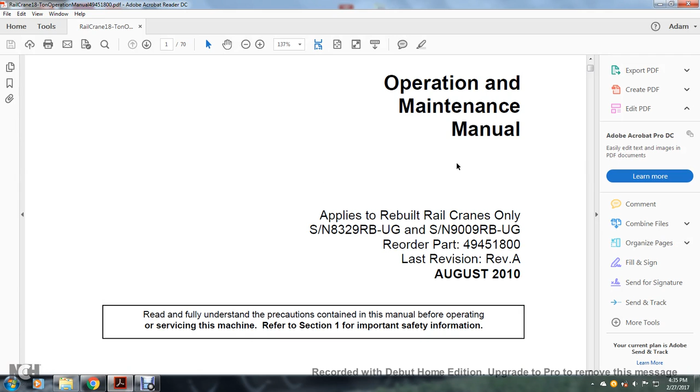The Nordco Rail Crane RBUG Operation Maintenance Manual applies to rebuilt rail cranes only. Latest version is A, August 2010.

Section 1, Safety: safety alert symbols, definitions, general safety tips, safety prior to working, safety while starting the machine, safety while operating and traveling, safety while parked, safety during maintenance, machine safety alerts, lockout and tag out requirements and procedures.

Section 2: general about this manual, machine specification, general machine, general crane system specification, sling load capacities, optional info, working in winds recommendations. Machine dimensional information not available in time for printing.

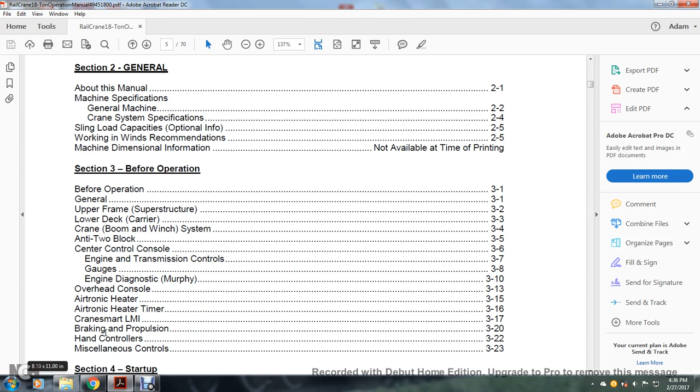Section 3, before operation: general upper frame, lower deck, upper frame superstructure, lower frame carrier, crane, boom and winch system, anti-two block, center control console, engine, transmission controls, gauges, engine diagnostic, Murphy, overhead console, Airtronic heater, timer, Cranesmart, LMI, brake propulsion and hand controls, miscellaneous controls.

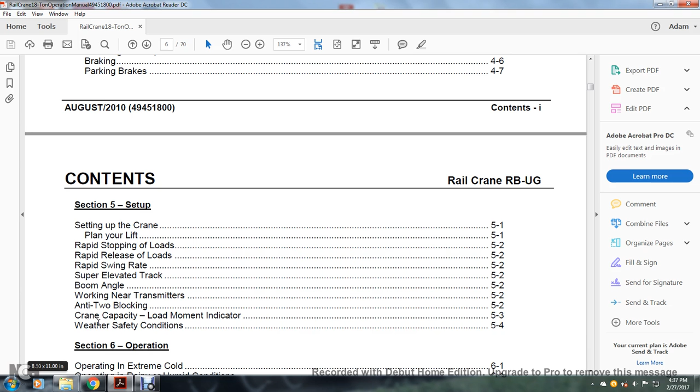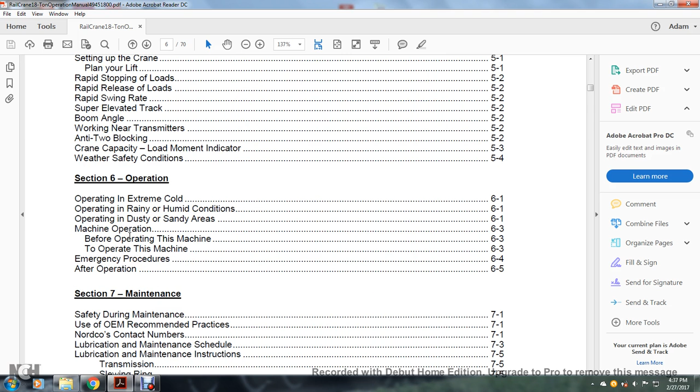Weight, weather safety conditions. Section 6: operation in extreme cold, operation in rainy and humid conditions, operation in dusty and sandy areas. Machine operation: before operation of the machine, to operate the machine, emergency procedures, after operations.

Section 7, maintenance: safety during maintenance, use of OEM recommended practices, Nordco contact numbers, lubrication maintenance schedule, lubrication maintenance instructions, transmission, slewing ring, air dryer, crane system general, general pneumatic drive, pneumatic hydraulic winches, magnet winches, rotomatic magnet gear, generator, sheaves, rope inspection.

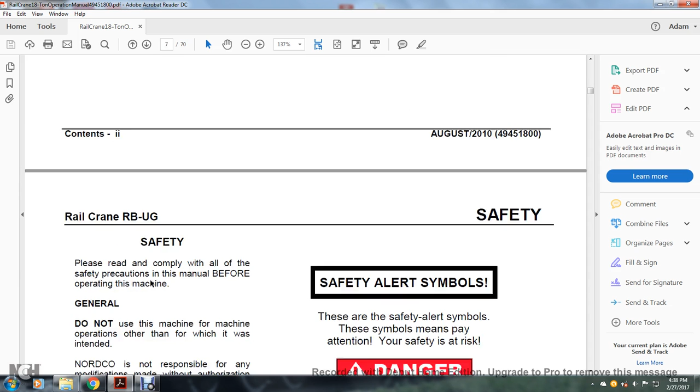Safety. Please read and comply with all the safety precautions in this manual before operating the machine. General: do not use this machine for operation other than what it was intended for.

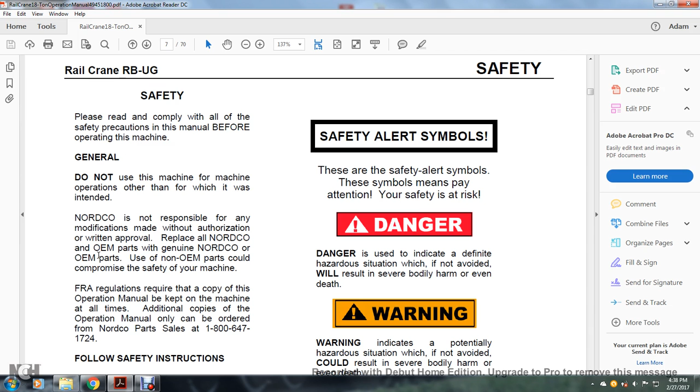Nordco is not responsible for any modification without authorization or written approval. Replace Nordco or OEM parts with genuine Nordco or OEM parts. Use of non-OEM parts could compromise the safety of your machine.

FRA regulations require that a copy of this operation manual be kept with the machine at all times. An additional copy of the operation manual can be ordered from Nordco Parts Sales at 1-800-647-1724.

Follow safety instructions. Carefully read all the safety messages in this manual. Learn how to operate the machine and how to use the controls properly. Do not let anyone operate the machine without instruction. Failure to understand the contents of this manual could result in serious personal injury or death. Safety alerts in this manual are for the machine as it was designed.

The operator and job site supervisor should have knowledge of the applicable OSHA regulations in the U.S. and CSA standards in Canada, Z150-98, and suggested American Society of Mechanical Engineering and American National Standards Institute safety standards for cranes.

A good reference source for crane safety is the Department of Energy standard for hoisting and rigging. Copies of standards specifically related to rail cranes can be found on the DVD or CD supplied with this machine. It is not provided in paper format.

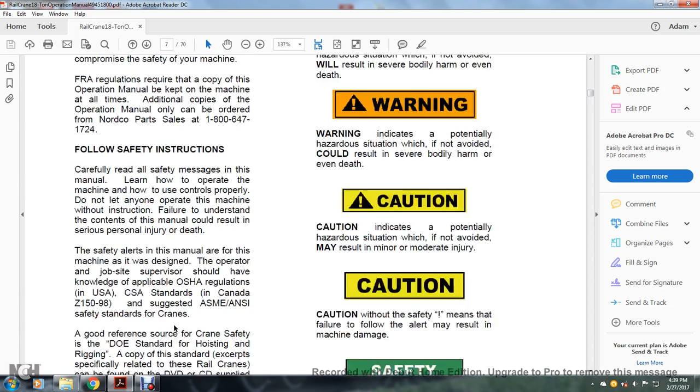Safety alert symbols: check out the large white and black block with the extreme exclamation point. These are safety alert symbols. These symbols mean pay attention to your safety risk.

A square danger symbol with a triangle and an exclamation point in white and red is 'Danger', used to indicate a definite hazard situation which, if not avoided, will result in severe bodily harm or even death.

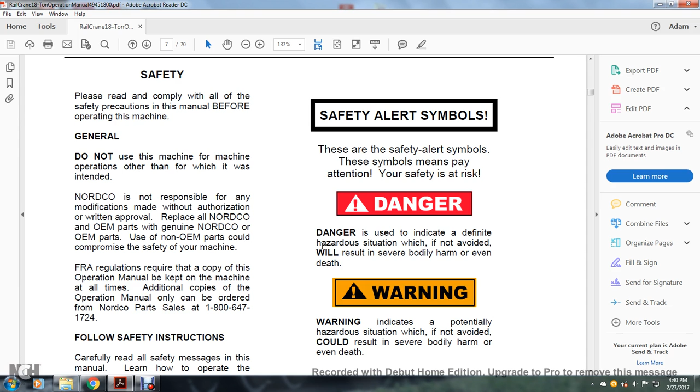A square triangle with an exclamation point in black and yellow is 'Warning', which indicates a potential hazard situation which, if not avoided, could result in severe bodily harm or even death.

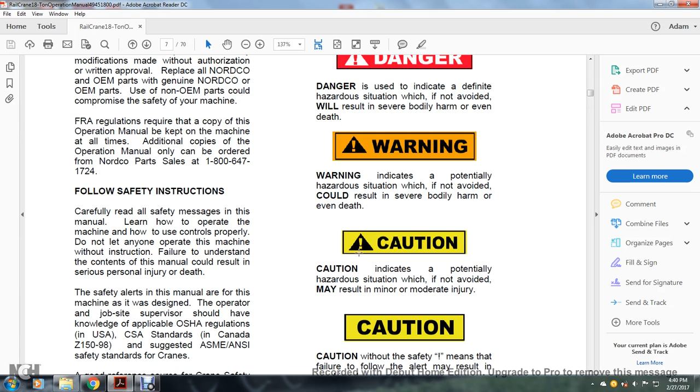A yellow 'Caution' with an exclamation point triangle indicates a potential hazard situation which, if not avoided, may result in minor or moderate injury.

Caution in yellow and black, shown without the exclamation point, means that failure to follow the alert may result in machine damage.

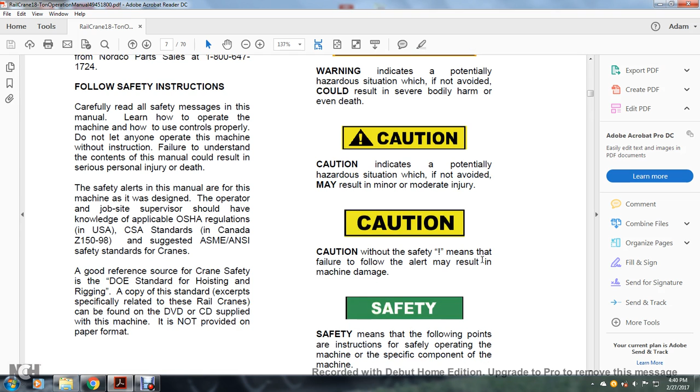A green and white 'Safety' symbol means the following points are instructions for safely operating the machine and its specific components.

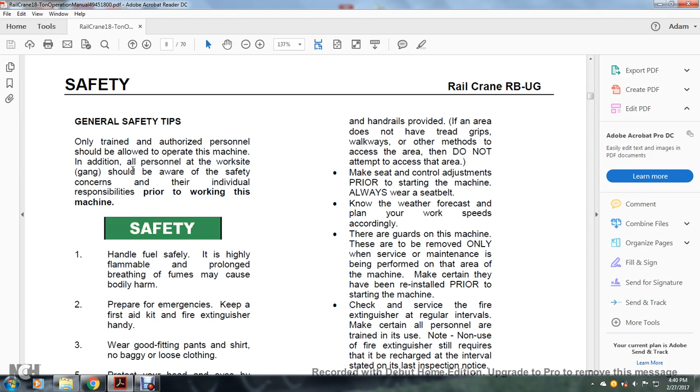General safety tips: only trained, authorized personnel should be allowed to operate the machine. In addition, all personnel at the work site should be aware of the safety concerns and their individual responsibility prior to working with this machine.

Handle fuel safely. It is highly flammable, and prolonged breathing of the fumes may cause bodily harm. Prepare for emergencies by keeping a fire extinguisher handy.

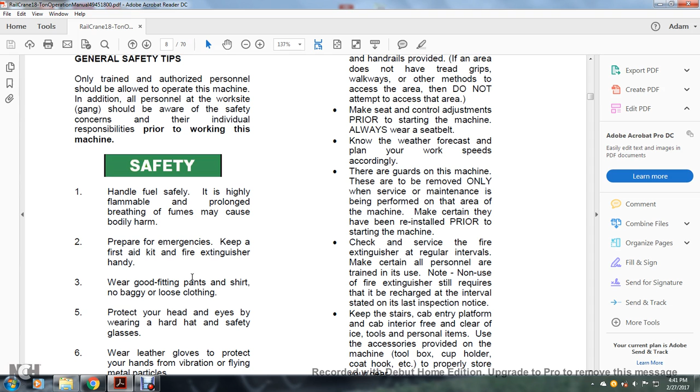Wear good-fitting pants and shirts, no baggy or loose clothing. Protect your head and eyes by wearing a hard hat and safety glasses. Wear gloves to protect your hands from vibration or flying metal particles. Use safety-toed work boots.

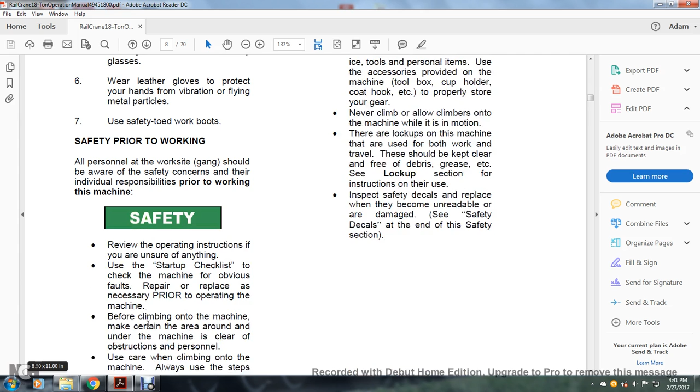Safety prior to working: all personnel at the work site should be aware of the safety concerns and their individual responsibility prior to working with this machine.

Review the operating instructions if you are unsure of anything. Use the startup checklist to check for obvious faults in the machine, and repair or replace parts as necessary prior to operating the machine.

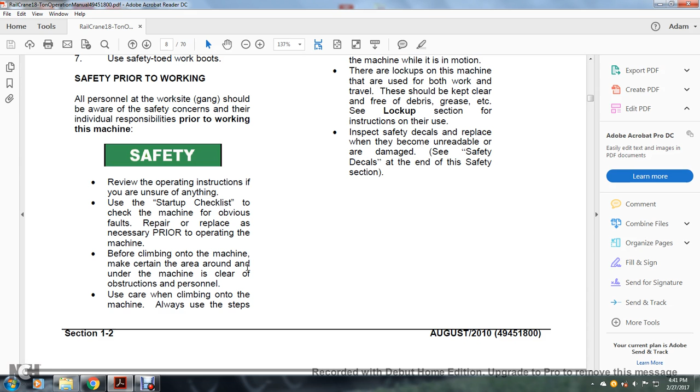Before climbing onto the machine, make certain the areas around and under it are clear of obstructions and personnel. Use care when climbing onto the machine. Always use the steps and handrails provided. If an area does not have tread grips, walkways, or other methods of access, do not attempt access to that area.

Make seat and control adjustments prior to starting the machine. Always wear a seatbelt. Know the weather forecast and plan your work speeds accordingly.

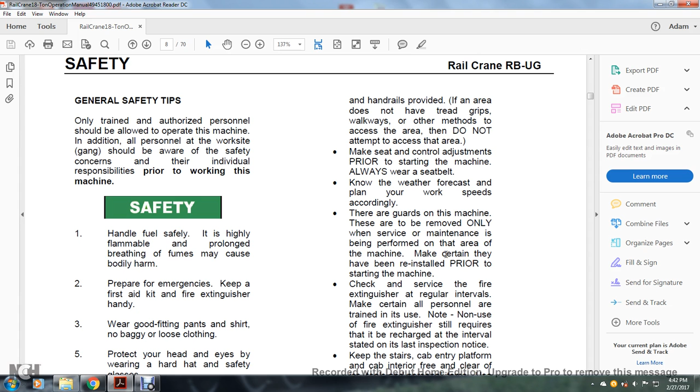If the guards on the machine are removed, they are to be removed only when service or maintenance is being performed on that area of the machine. Make certain they have been reinstalled prior to starting the machine.

Check and service the fire extinguisher at regular intervals, and make certain all personnel are trained to use it. Note that even if not used, the fire extinguisher still requires recharging at the intervals stated on the last inspection notice.

Keep the stairs, cab entryway, platform, and cab interior free and clear of ice, tools, and personal items. Use the accessories provided on the machine, such as the toolbox, cup holder, and coat hook, to properly store your gear.

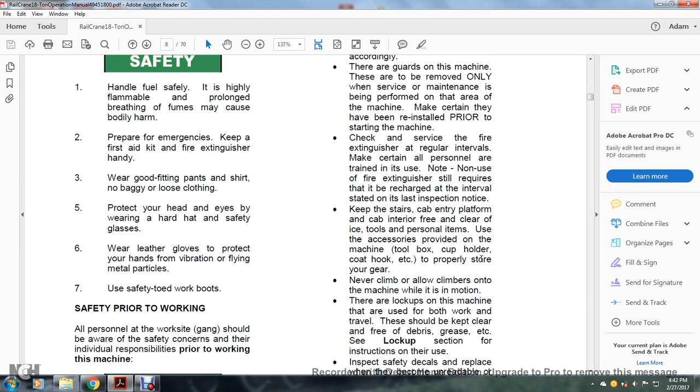Never allow climbing onto the machine while it is in motion. There are lockups on the machine used for both work and travel; these should be kept clear and free of debris or grease. See the lockup section for instructions on their use.

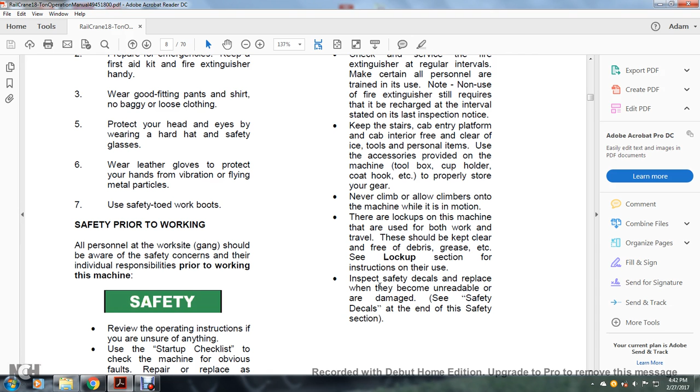Inspect and replace safety decals where they become unreadable or damaged. See the safety decals at the end of the safety section.

Safety while starting the machine: Nordco recommends the use of the command position. This means the machine should never be running unless someone is at or near the main control panel or remote control boxes, to prevent injury or damage to the machine. This is highly recommended.

Safety: only start or operate the machine when seated in the operator's seat. Check the startup checklist, and check the machine controls and gauges to make certain the system is operating correctly.

Safety while operating and traveling: assume all power lines are live. While operating the boom, make certain the boom and load stay at least 10 feet away from electrical power lines. If you do not know the voltage of nearby power lines, assume the maximum voltage and stay clear by at least 45 feet.

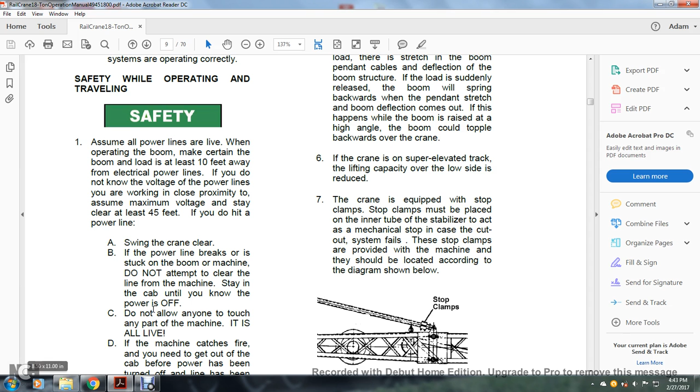If you do hit a power line, swing the crane clear. If the power line breaks and gets stuck on the boom or machine, do not attempt to clear the line from the machine. Stay in the cab until you know the power is off, and do not allow anyone to touch any part of the machine, as it is still live. If your machine catches fire, you need to get out of the cab.

Before the power has been turned off and the line has been cleared, you must jump clear of the machine. Do not touch any part of the machine during the escape, and do not touch the crane while stepping on the ground. This will be fatal.

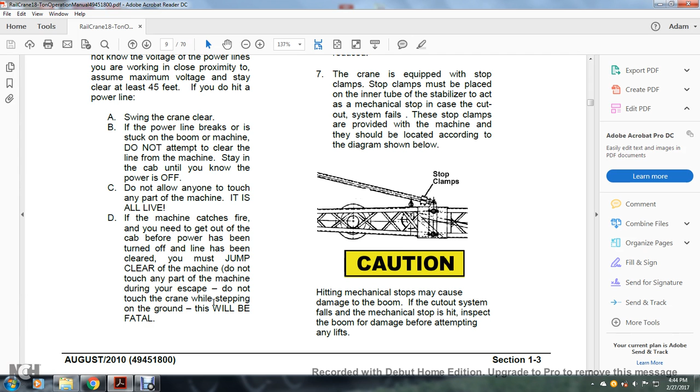Be especially careful when swinging, as the load's momentum can effectively cause the load to exceed the crane's capacity. Be aware that crane capacity is reduced when loaded at a right angle with the track over the side. Refer to the capacity chart and dimensional information in the general section of the manual for more information.

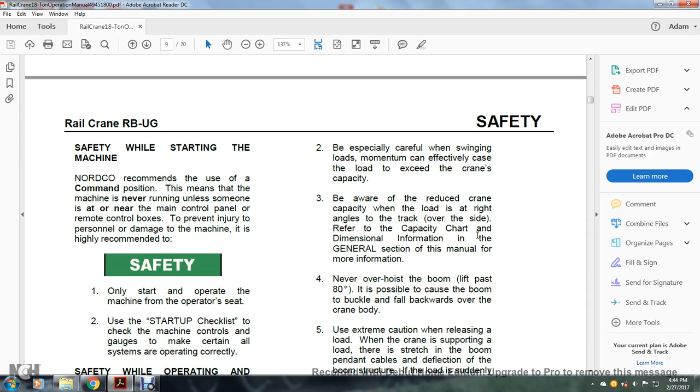Never overhoist the boom or lift past 80 degrees; it's possible to cause the boom to buckle and fall backward over the crane body. Use extreme caution when releasing the load, as when the crane is supporting a load under tension, there is a stretch in the boom pendant cables deflecting with the boom structure.

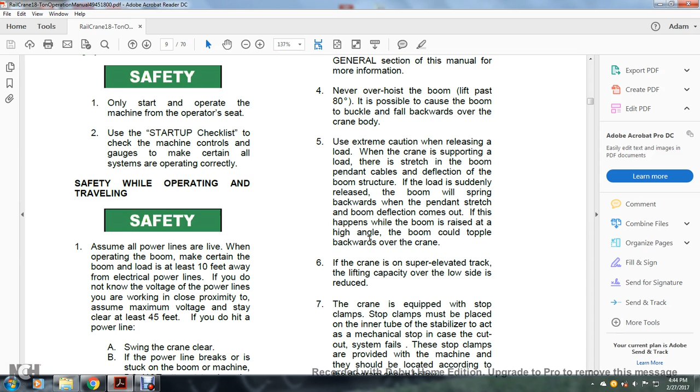A load suddenly released causes the boom to spring backwards when pendant stretch and boom deflection come out. If this happens while the boom is raised at a high angle, the boom could topple backwards over the crane. If the crane is on a super-elevated track, the lifting capacity over the low side is reduced.

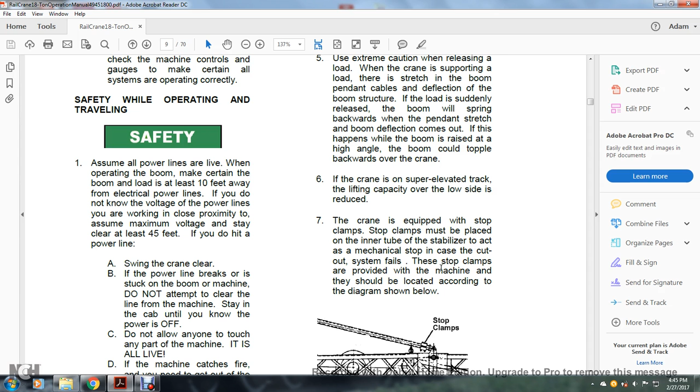The crane is equipped with stop clamps. Stop clamps must be placed at the inner tube of the stabilizer to act as a mechanical stop in case the cutout system fails. These stop clamps are provided with the machine and should be located according to the diagram shown below, on the boom and on the crane.

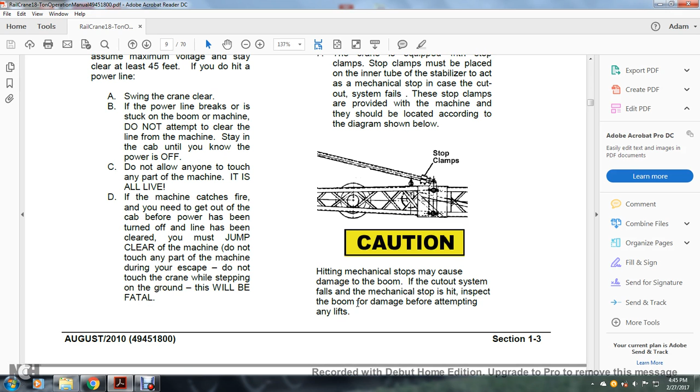Caution: hitting mechanical stops may cause damage to the boom. If a cutout system fails, mechanical stop contact may damage the boom. Inspect the boom before attempting any lifts. Never operate the crane with a damaged boom. Even slight damage can greatly reduce boom strength. The boom must be replaced or repaired before the crane is used.

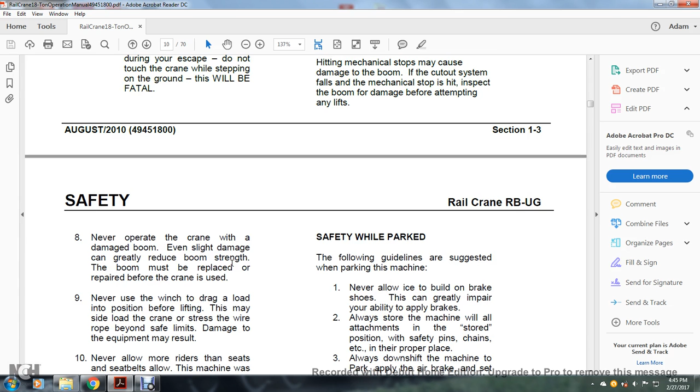Never use the winch to drag a load or pull it into position before lifting. This may side load the crane, or stress the wire rope beyond safe limits. Damage to the equipment may result.

Never allow more riders than there are seats or seat belts for. The machine was designed to be operated by one person and allows one passenger. This machine is equipped with a seat cutoff switch that disables machine function if the operator is not seated to operate the machine. Do not disable this function.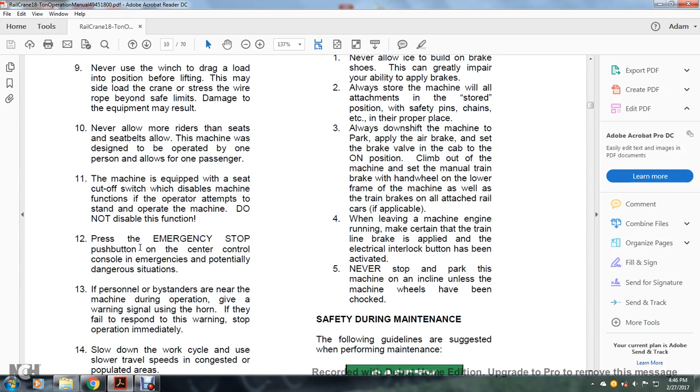Press the emergency stop button on the central control console in emergencies or potentially dangerous situations. If personnel or bystanders are near the machine during operation, give a warning signal using the horn. If they fail to respond to the warning, stop operation immediately.

Slow down the work cycle. Use slow travel speeds in congested and populated areas.

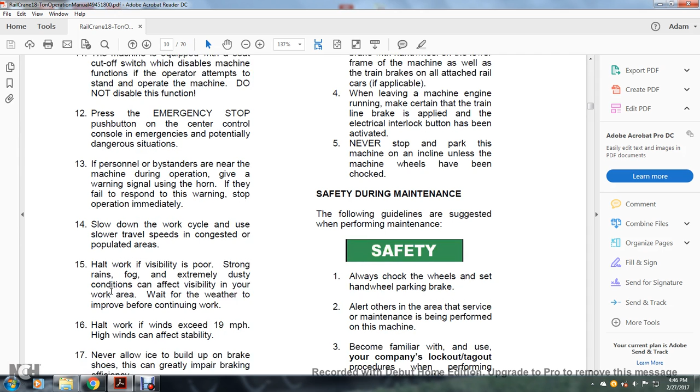Halt work in poor visibility. Strong rains, fog, and extremely dusty conditions can affect visibility in your work area. Wait for the weather to improve before continuing work. Halt work if winds exceed 19 miles an hour, as high winds can affect stability.

Never allow ice to build up on the brake shoes, as it will greatly impair braking efficiency. Never operate the machine without a working Cranesmart LMI. This is an essential piece of safety equipment.

Safety while parked: the following guidelines are suggested while parking the machine. Never allow ice to build on the brake shoes, as it greatly impairs your ability to apply the brakes.

Always store the machine with all attachments in the stored position, with safety pins, chains, etc. in proper place. Always downshift the machine to park, apply the air brake, and set the brake valve in the cab to the on position.

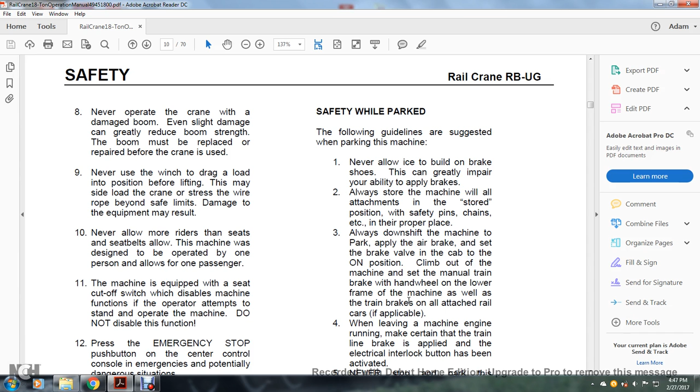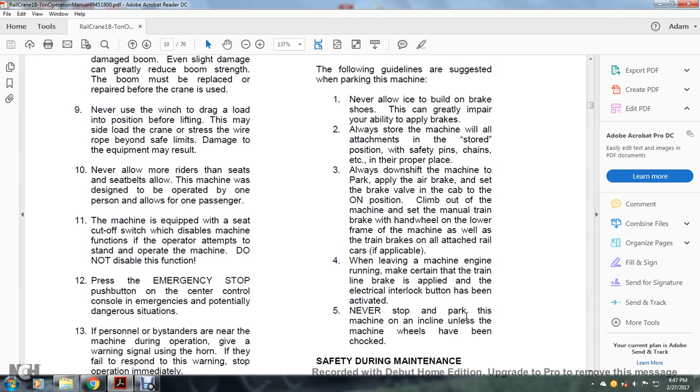Climb out of the machine and set the manual train brake hand wheel on the lower frame of the machine, as well as the train brakes on all attached rail cars if applicable. When leaving the machine with the engine running, make certain the train line brake is applied and the electrical interlock button has been activated. Never stop and park the machine on an incline unless the machine's wheels have been chocked.

Safety during maintenance: the following guidelines are suggested for when performing maintenance.

Always chock the wheels and set the hand brake or hand parking brake. Always alert others entering the area that service or maintenance is being performed on the machine.

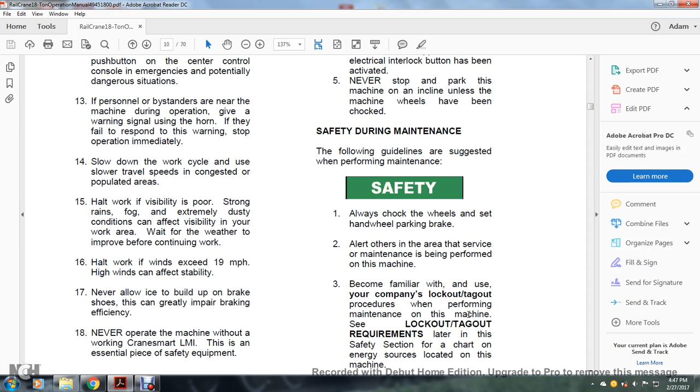Become familiar with the use of your company's lockout and tag procedure when performing maintenance on the machine. See the lockout tag requirements later in the safety section for the chart of energy sources located on the machine. Do not start the engine or perform repairs while working alone.

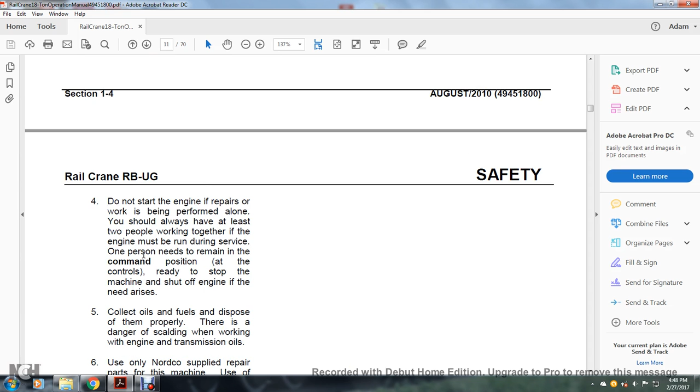Work should always be performed with at least two people working together. If the engine must be running during service, one person needs to remain in the command position at the controls, ready to stop the machine and shut off the engine if the need arises.

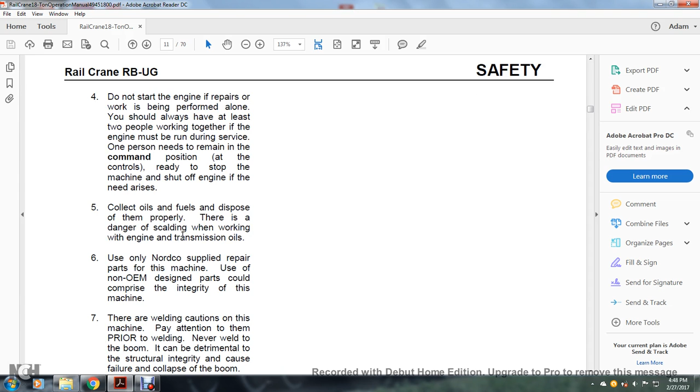Collect oils and fuels and dispose of them properly. Use caution, as there is danger of scalding when working with hot engine and transmission fluids or oils. Use only Nordco-supplied repair parts for the machine.

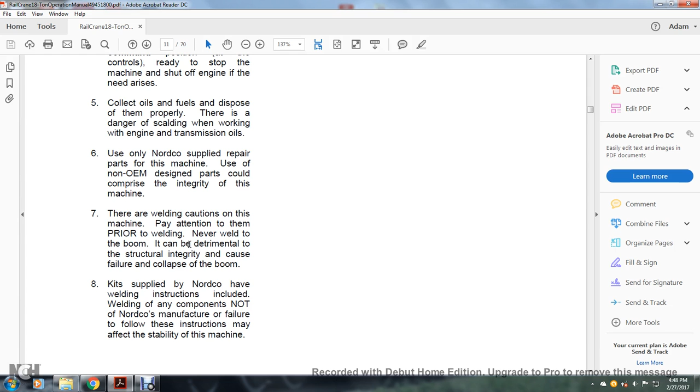Using non-OEM or off-design parts will compromise the integrity of the machine. Note the welding cautions on the machine and pay attention to them prior to welding. Never weld to the boom, as it could be detrimental to the structural integrity and cause failure or collapse of the boom.

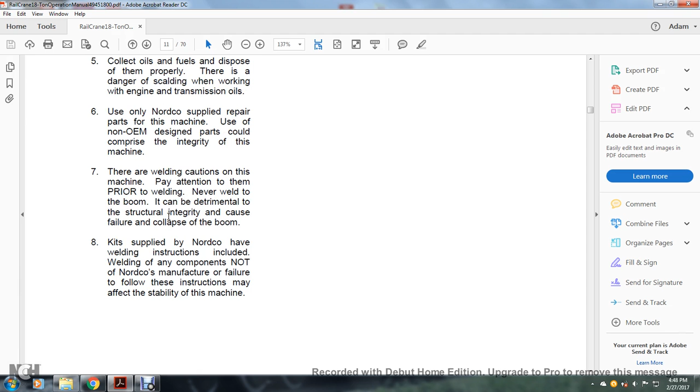Kits supplied by Nordco have the welding instructions included. Welding of any components not supplied by the Nordco manufacturer and failure to follow these instructions may affect the stability of the machine.

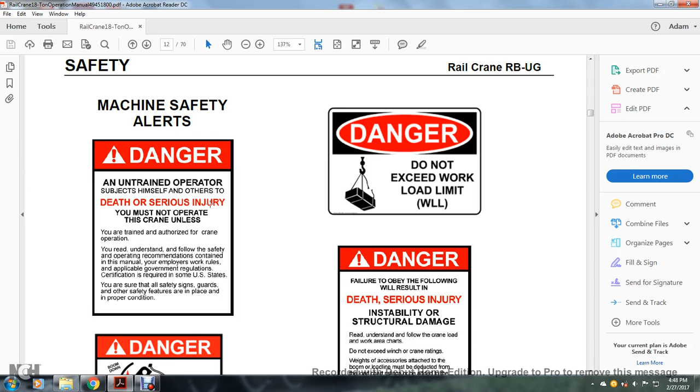Machine safety alert: danger. An untrained operator subjects himself or others to death and serious injury. You must not operate this crane unless you're trained and authorized for crane operation, and understand and follow the safety and operating recommendations contained in this manual, your employer's work rules, and applicable government regulations. Certification is required in some U.S. states. Ensure all safety signs, guards, and other safety features are in place and in proper condition.

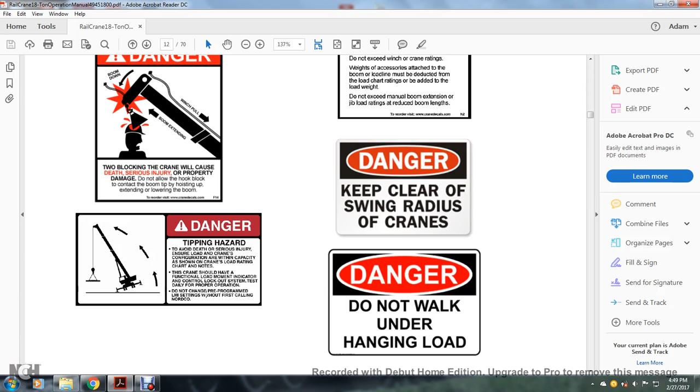Danger, tipping hazard. To avoid death or serious injury, ensure the load and crane configuration match the capacity shown on the load rating chart's notes. The crane should have a functional load moment indicator and control lockout system, tested daily for proper operation. Do not change the pre-programmed LMI settings without first calling Nordco.

Danger: do not exceed workload limits. Failure to obey the following will result in death, serious injury, instability, or structural damage. Understand and follow the crane load work area charts. Do not exceed the winch or crane ratings. The weight of any accessory attached to the boom or load line must be deducted from the load chart ratings and added to the load weight. Do not exceed the manual boom extension and jib load ratings for reduced boom lengths.

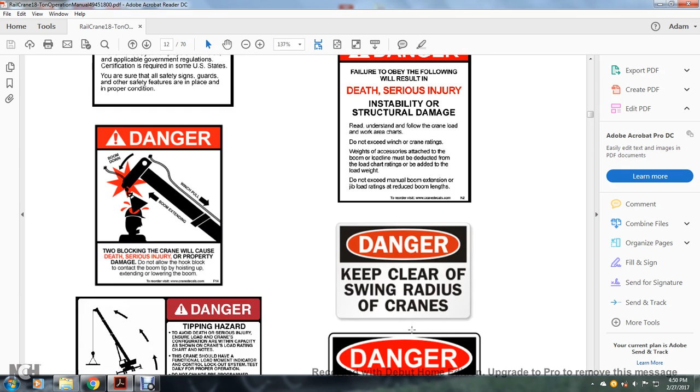Danger: keep clear of the swinging radius of the crane. Danger: do not walk under a hanging load.

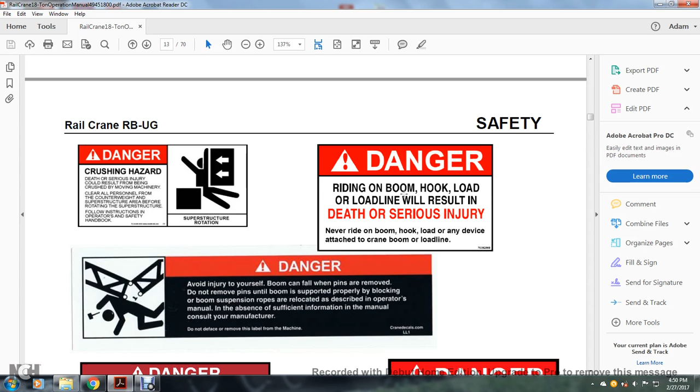Danger: riding on the boom, hook, load, or load line will result in death or serious injury. Never ride on the boom, hook, load, or any device attached to the crane boom or load line.

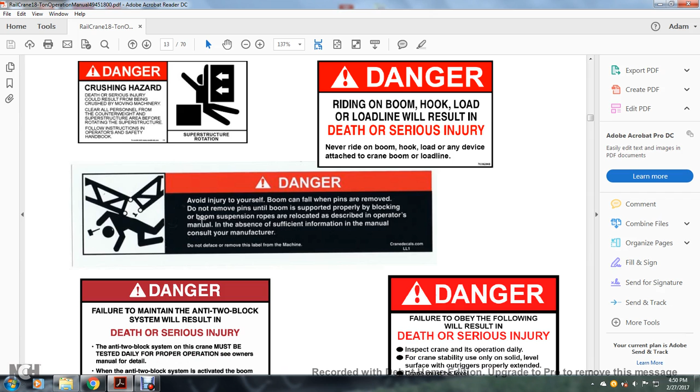Danger: avoid injury to yourself. The boom can fall when the pins are removed. Do not remove the pins until the boom is properly supported by blocking or boom suspension ropes are relocated as described in the operator's manual. In the absence of sufficient information in the manual, consult with the manufacturer.

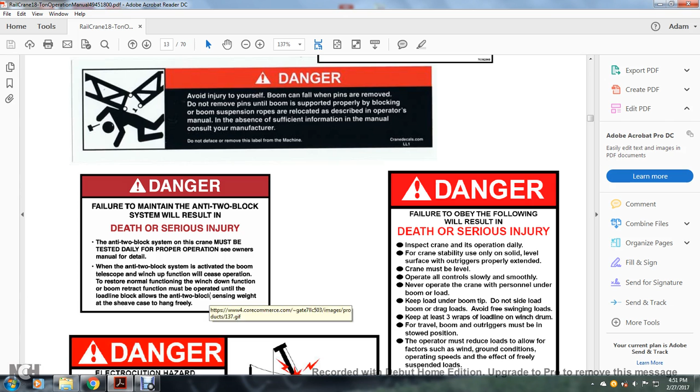Danger: failure to maintain the anti-two-block system will result in death or serious injury. The anti-two-block system of the crane must be tested daily for proper operation, see the owner's manual for details. When the anti-two-block system is activated while the boom is telescoping or the winch is raising, the function will cease operation. To restore normal function, the winch-down function or boom retraction function must be operated until the load line block allows the anti-two-block sensing weight to hang freely.

Danger: failure to obey the following will result in death or serious injury. Inspect the crane and operation daily for crane stability. Use only solid, level surfaces for the outriggers. A properly extended crane must be level. Operate all controls smoothly. Never operate the crane with personnel under the boom or load. Keep load under the boom tip. Do not side load boom or drag loads, or allow free-swinging loads.

Keep at least 3 wraps of the load line on the winch drum at all times. When traveling, outriggers must be in the stowed position. The operator must reduce loads to allow for factors such as wind, ground or support conditions, operation speed, and effects of freely suspended loads.

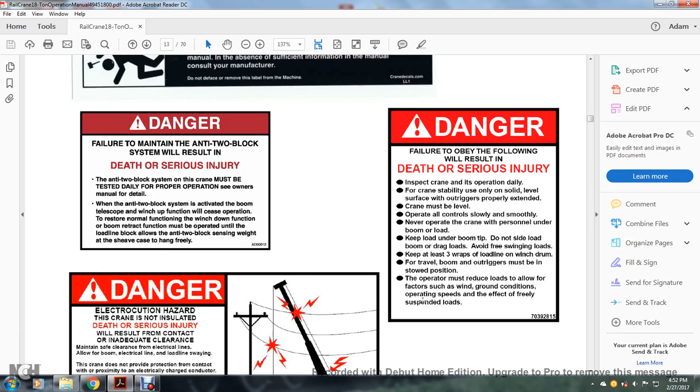Danger: electrocution hazard: this crane is not insulated. Death or serious injury will result from contact or inadequate clearance. Maintain safety clearance for the electrical lines, and allow for the boom, electrical line, and load line swaying.

This crane does not provide protection from contact with or proximity to an electrically charged conductor, maintain a clearance of at least 10 feet between any part of the crane, load line, or the load and any electrical line carrying up to 50,000 volts.

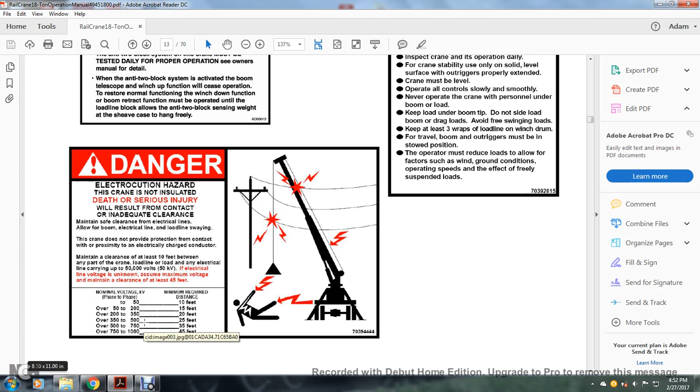If the electrical line voltage is unknown, assume the maximum voltage and maintain clearance of at least 45 feet. Nominal voltage, kV, phase to phase: up to 50 kV, 10 feet; 50 to 200 kV, 15 feet; 200 to 350 kV, 20 feet; 350 to 500 kV, 25 feet; 500 to 750 kV, 35 feet; 750 to 1,000 kV, 45 feet.

Additional danger alerts. Danger: improper use of the machine. Any type of operation can cause serious injury or death. To avoid serious injury and death, make sure the area under the machine is clear of all personnel and obstructions.

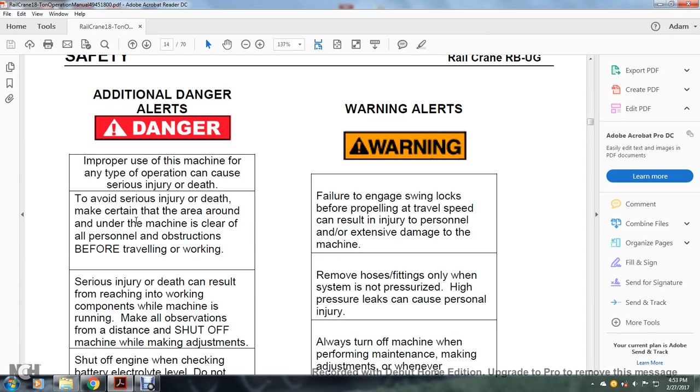Before traveling or working, serious injury or death can result from reaching into working components while the machine is running. Make all observations from a distance and shut off the machine while making adjustments.

Shut off the engine while checking the battery electrolyte level. Do not check or fill the battery in the presence of open flame, sparks, or smoking. Battery fumes are flammable or explosive. If ignited, this will result in severe bodily injury or death.

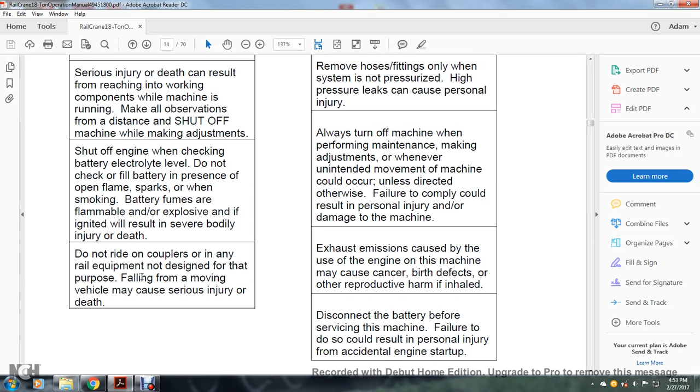Do not ride on couplers or any rail equipment not designed for that purpose. Falling from a moving vehicle may cause serious injury or death.

Warning alerts. Warning: failure to engage the swing locks before propelling at travel speed can result in injury to personnel or extensive damage to the machine.

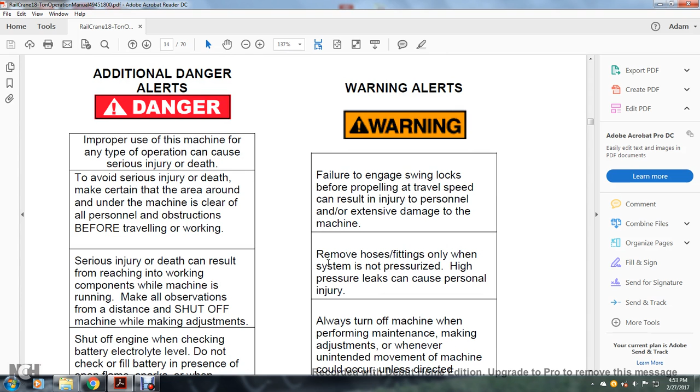Remove hose fittings only when the system is not pressurized. High pressure leaks can cause personal injury.

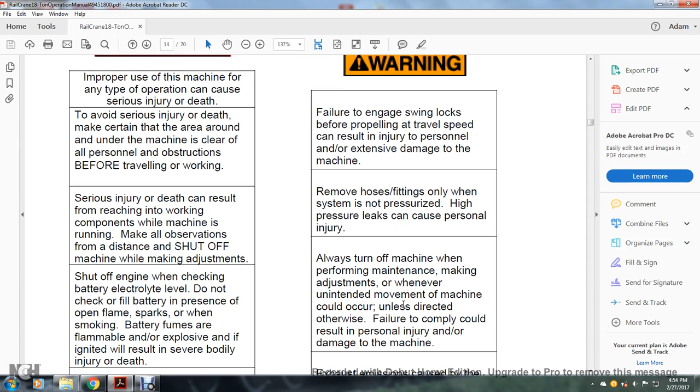Always turn off the machine when performing maintenance or making adjustments whenever unintended movement of the machine could occur, unless directed otherwise. Failure to comply could result in personal injury and/or damage to the machine.

Exhaust emissions could be caused by use of the engine on the machine. May cause cancer, birth defects, and other reproductive harm.

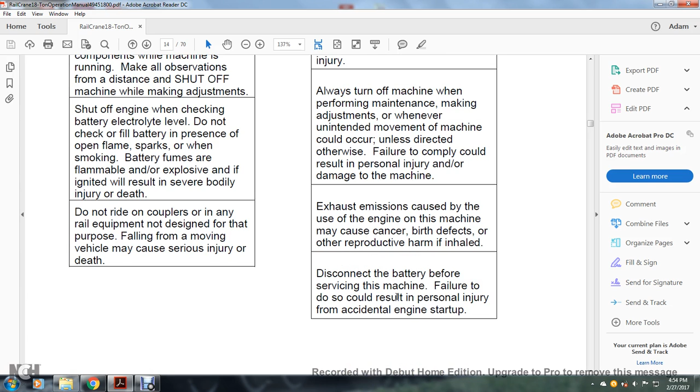If inhaled, disconnect the battery before servicing this machine. Failure to do so could result in personal injury from accidental engine startup.

Lockout and tagout requirements. The following list suggests a lockout procedure with all the components of the machine required for lockout due to the storage of various forms of energy. The company is responsible for the lockout and tagout procedure based on this list, train.

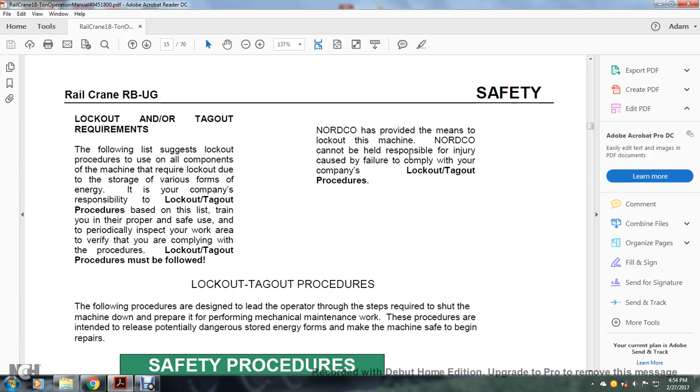Use proper safety procedures to periodically inspect your work area to verify that you are complying with the procedure. Lockout and tagout procedures must be followed. Nordco has provided the means to lock out the machine, but Nordco cannot be held responsible for injury caused by failure to comply with your company's lockout or tagout procedures.

Lockout and tagout procedure. The following procedure is designed to lead the operator step by step through shutting down the machine, preparing it, and performing mechanical maintenance work. These procedures are intended to release potentially dangerous stored energy forms, making the machine safe to begin repair.

Safety procedure: lockout, tagout. One, chock wheels to prevent accidental rolling of the machine on grade. Two, if you have not already done so, determine what components require maintenance, and place all machine mechanical systems or workheads in the fully up and locked position.

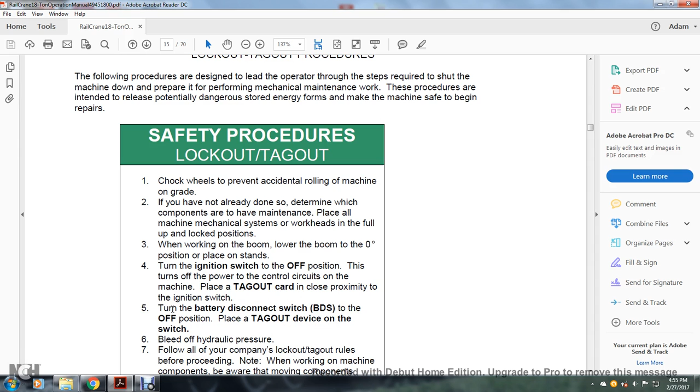Three, when working on the boom, lower the boom to a zero-degree position or place on stands. Turn the ignition switch to the off position. This turns off power to the control circuits on the machine. Place the tagout card in close proximity to the ignition switch.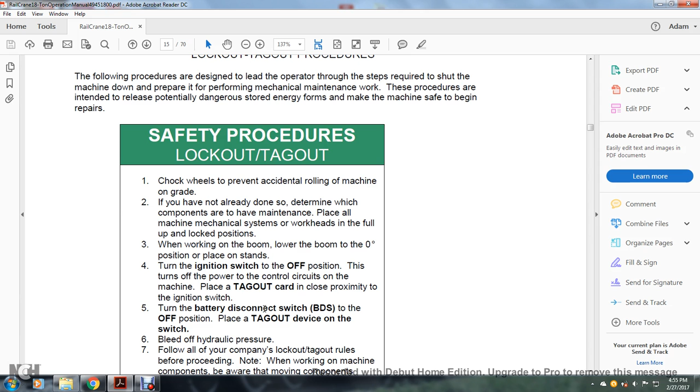Turn the battery disconnect switch, or BDS, to the off position and place the tagout device on the switch. Bleed off the hydraulic pressure. Seven, follow all of your company's lockout tagout rules before proceeding.

Note: when working on the machine components, be aware that moving components during repairs may create energy, such as moving a hydraulic cylinder. Proper precautions should be taken.

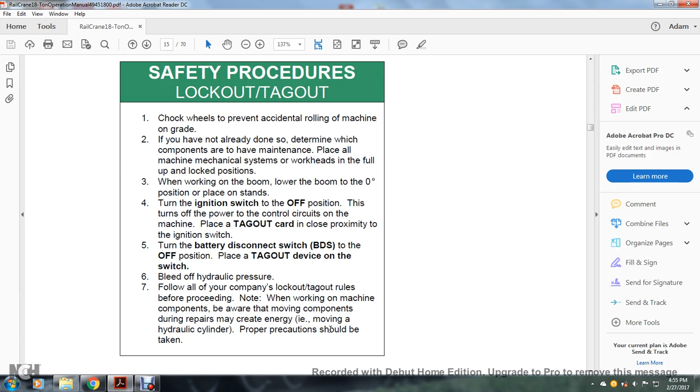Safety decals on the machine. Safety decals and plaques have been placed on the machine and should be kept clean and legible. Replace any decals or plaques that have become illegible or missing, or when repairing or replacing components that have safety decals on them. It is your responsibility to replace the safety decals, and they can be ordered through the parts sales department.

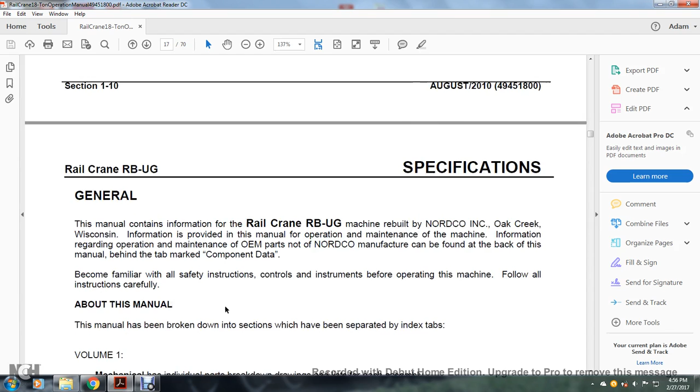Refer to Figure 6.4 of the mechanical section for the parts numbers of all safety decals and plaques.